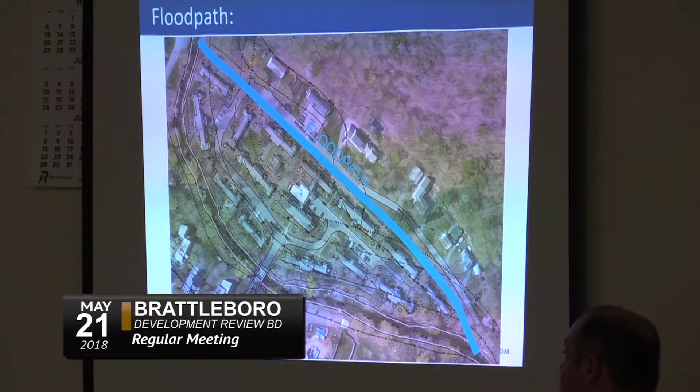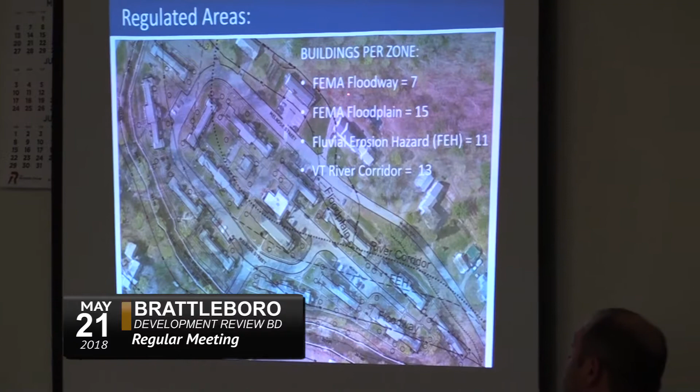And if we look at this next slide here, this shows the approximate flood path that occurred during Irene, where the water actually overtopped a retaining wall here and was flowing behind all these buildings, where the Whetstone actually is down this way here. So many of these buildings were damaged during Irene and have been historically damaged. So as part of the site, these are many of the flood hazards located on the site. We have the FEMA floodway, which is shown down here. We also have the FEMA floodplain, which is up here. The fluvial erosion hazard line is here, and then the Vermont river corridor is this dashed line here. So you can see the site is very prone to many different hazards.

Where do those come from? Well, the FEMA lines are directly from the flood insurance study for the town of Brattleboro. And these lines are from the state river corridor work. Okay. And they just represent how the river wants to try and move around a bit and gives the river room to move. Unfortunately, we have development in these areas that we have to protect.

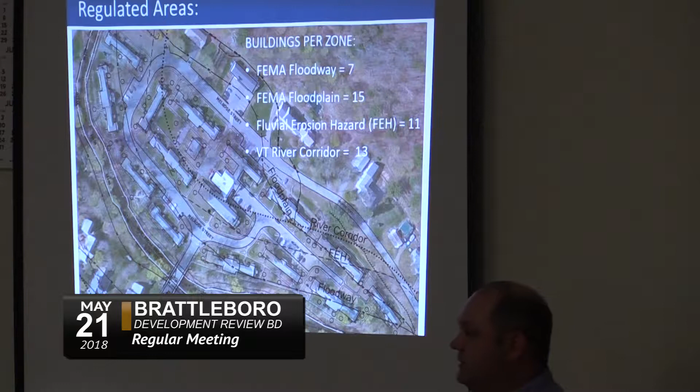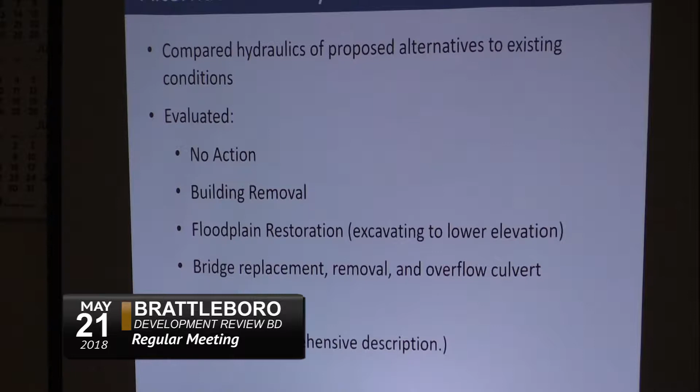So as part of the first phase of the project, we went through a series of different alternatives and looked at many different options for trying to reduce the flood risks on this site, including, of course, we always look at no action, building removal, floodplain restoration, replacement of bridges, and also a combination of all of those together. And there's been a report prepared that summarizes all those alternatives and how we came to the preferred alternative.

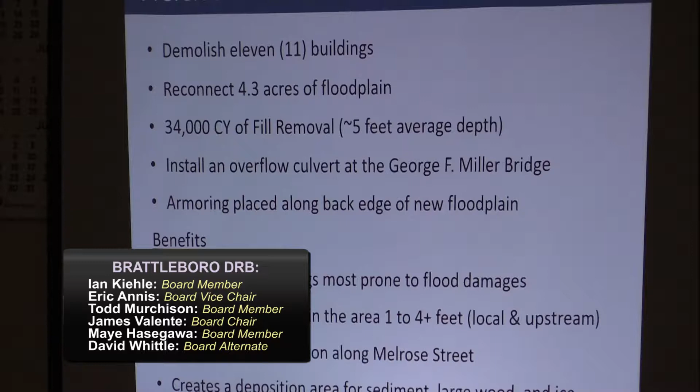So under the preferred alternative, we are looking at demolishing 11 of the residential apartment buildings that are on the site. And part of that project will be to create and reconnect almost 4.3 acres worth of floodplain. So that will become new flood storage given back to the river. And approximately 34,000 cubic yards of fill removed from that area, which averages about 5 feet. Average maximum, I believe, is around 7 feet.

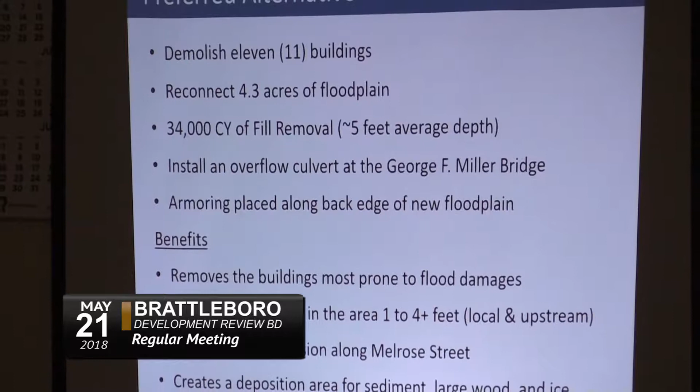And there's also an installation of an overflow culvert. So this culvert will actually sit up a little bit higher than the normal channel and allow water to flow under the George F. Miller Bridge. It will be placed next to the bridge. And then also, to protect the remaining buildings and infrastructure, at the rear of the floodplain will be some slope armoring to provide protection against that.

So a list of the primary benefits of this project: we're removing several of the buildings from the flood risk hazard area, also reducing the flood levels locally and upstream by about 1 to 4 feet, depending on where exactly you are. Also, we limit or reduce the risk of the water flowing behind the buildings, because now we have more flood storage and the water will access that area first, rather than overtop the wall that sends water out behind the buildings.

And it also creates an area for sediment and large woody debris. Any ice flowing down the river will store on the flood bench, on the restored floodplain, rather than becoming clogged at a bridge, such as the Route 9 bridge or the George F. Miller Bridge.

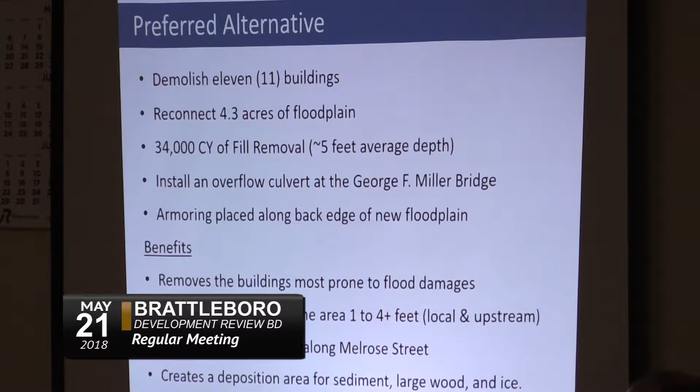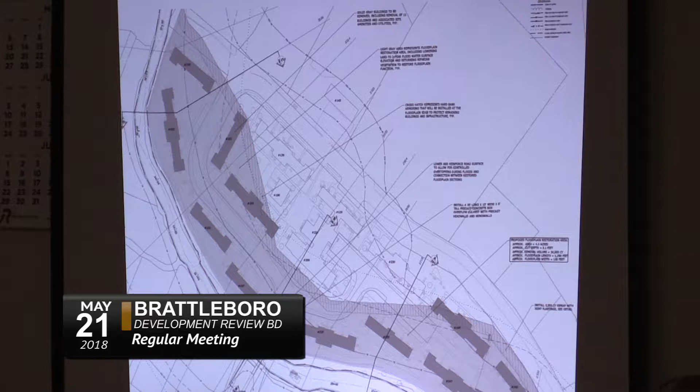So now we have cross sections. So if you took a slice through the site, this upper area, the gray represents a building to be removed, whereas this building is to remain. This hatched area is the material to be removed. And then we have the armoring here. So the upper cross-section and the lower cross-section are very similar, where you have the building removal and excavation of the material on this site. The middle section actually cuts through the George F. Miller Bridge. And you can see this is the existing opening here, and that's the overflow.

To point out, the dashed line here is the existing 100-year flood elevation, and the solid black line is the reduction in flood. So that represents about a 1 to 4 foot lowering. So up here, that's probably the 4 foot lowering here. That's likely about 2 feet, and here's probably also around 2 feet. Also on the restored floodplain, there'll be new plantings, revegetation of the disturbed land where the floodplain is being created.

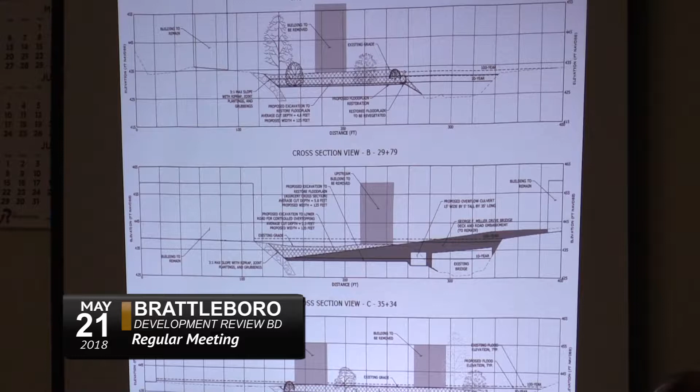I think it might be helpful, given that we have a lot of members of the public here who I think have an interest in this, if you described the difference between the floodplain and the floodway. Sure. So the floodplain is the area that's inundated by a 100-year flood, and it represents the area that would be underwater. So the floodplain is projected out in either direction until it hits the terrain, the existing grade, for example. The floodway represents where the bulk of the water is moving downstream during a flood. And the way that's created is you essentially take the edges of your floodplain and you squeeze it down until you have like 1 foot of rise. And that is where the bulk of the water is moving during a flood of that size.

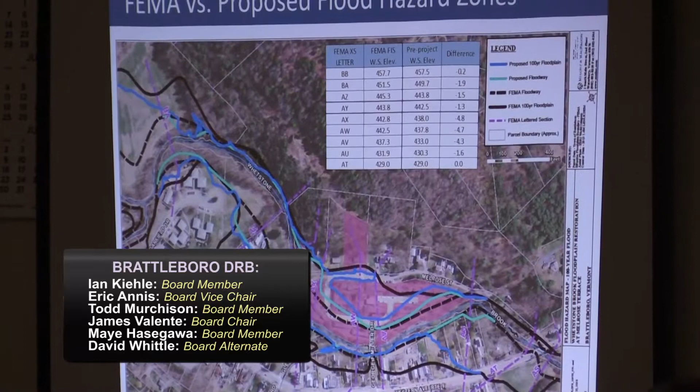I ask this not because it's relevant to your project, but is that the little park, Tri-Park, that got moved essentially into the floodway there? Is that the little row? Yeah, there, that sort of nub. Yes. That's off of Glen Street? Is that Glen Park here? Glen Park, okay. Sorry, go ahead.

That's okay. So here, the darker blue is the new 100-year floodplain limits, and the lighter blue is the floodway.

And if we cycle back and forth, you can see how the lines shrink in a bit, and that's based on constructing the new flood restoration project.

I just have a question about that dark blue line there. It seems odd - is your model saying the road will accommodate that? It just seems like a very odd shape there. Yeah, you're right, this is where that limit is now, so this whole area is included in the floodplain.

And then under proposed conditions, that shrinks down a bit, but it's showing us that this section of the road would still be under some water.

And then, if I remember that area, Melrose Street, at some point along there, there's a bit of a hill where the road sits much higher. Yeah, that's back in here, where it kind of rises up. This is low-lying all in here, and then that road. And right at the tip of that blue, there's a property, further to the left, that's not part of this. You see where that cross-section goes through, a little to the right - this one? Yep, and that would be before the hill, before the road goes up. Yeah, I think I see, okay thank you. Yep, I think that hill starts right here. Okay, you can proceed.

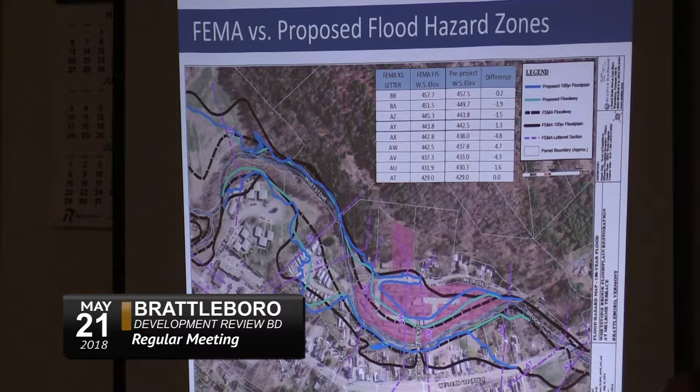So that's kind of where our project is at now. I just described the conditional letter of map revision, followed by a letter of map revision once the project is complete.

We're working on the finalization of the FEMA funding, which is funding all of the construction. These are the permits that are underway. As part of the project, we'll need an Army Corps permit.

The Vermont Stream Alteration Permit, and also a construction general permit. We are also working on our final design plans, and implementation of the project is looking to occur, at least the building demolition in 2018, followed by the floodplain restoration piece in 2019.

That's great, that's very helpful. Are there people on the board who have questions about this?

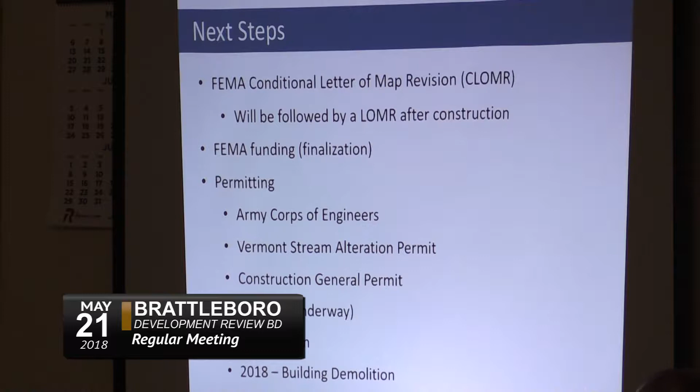On this right here, you show the buildings that may be removed. On the ones that you did previously, are there buildings going to be staying there once this is done? Is that the plan? Yes. And where would that be in the floodplain—if you want to go back a little bit to show the new floodplain limits.

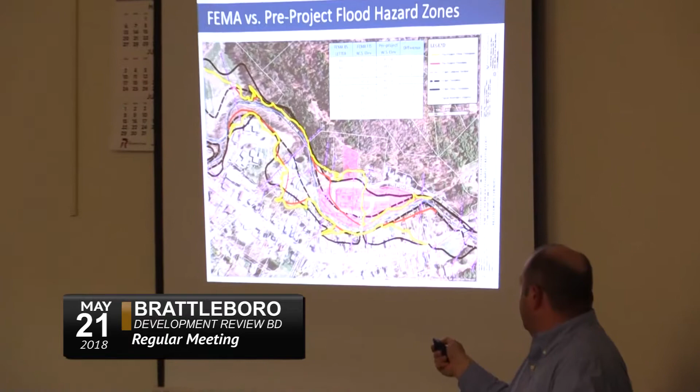I want to see where the buildings that are going to stay are. So this is existing here—these are the buildings that are staying, and one in here. And then under the proposed conditions, like these two buildings here would be outside the floodplain, whereas right now they would be inside. Same thing with these buildings here—these would be removed. I think these over here are being demolished, as well as those around the corner here.

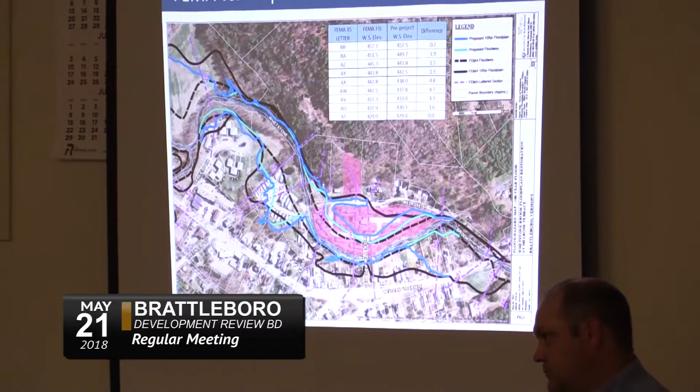This may or may not be germane, but is it likely that this revision would occur when FEMA reviews its maps anyway? It is, yeah. So anytime anyone does any project on a FEMA stream, they have to go through this same process.

They would also have to use the best available data, supplemented with the best topographic data available, plus new field survey. For example, this is a known constriction point that we looked at as part of our overall alternative analysis, the Route 9 bridge here. So if anything ever happens here, they would also have to study the stream and meet the same standards that we've met. And conversely, you can't really do anything without going through this process, correct?

That's correct, because there's a FEMA flood insurance study, it's a FEMA floodway, and also our funding required us to do a CLOMR. Just quick—this proposal's removing 11 buildings out of a total of 19.

So I'd like to open this up to the public, but I don't want to be premature. Is the board satisfied? Yeah, I'm fine.

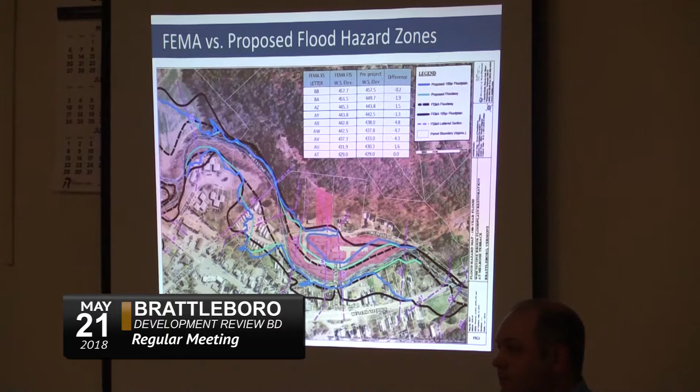My name is Aaron Diamondstone. I heard quite a bit—am I correct that you own the parcel, one of the parcels right next to this? Right next to it, yeah. And I heard a lot of talk about reducing floodwaters at Melrose and above, but I'm curious as to what happens below.

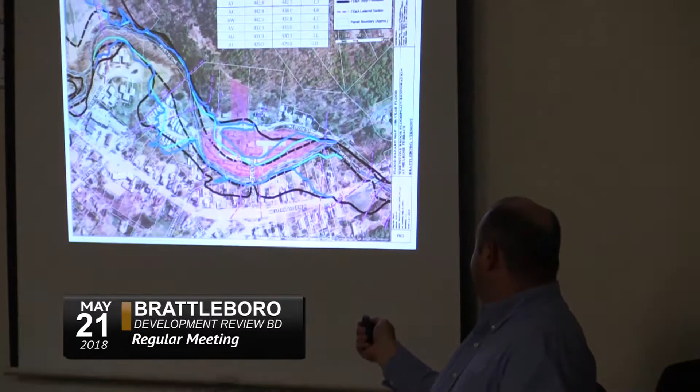So we are matching back into the FEMA data before you reach the Route 9 bridge. So in this stretch of the river here, we're matching back into the FEMA published data, so we're not reducing and we're not increasing the flood elevations in that section.

Is it correct that there would be a reduction in some of the severity or the speed of the water moving in a flood event because there would be additional capacity on the site? Well, the biggest benefit really is with that floodplain there—you're going to get the water spread out and slow down. So if there's a log, for example, flowing down the river, it's going to access that floodplain first and slow down, and there's much more chance for that log to settle out there than there will be here.

So if that log jams here at the bridge, which is already kind of constricting the flow some, you could get an increased backwater, and that even could raise the flood elevations through this reach. So even though their elevations stay the same, they might enjoy some kind of secondary benefits from this?

Yes. And one thing to note also, FEMA currently looks at only clear flow, meaning water moving down the stream without any debris or sediment in it. We saw that recently in Irene, where a lot of the culverts and bridges were clogged up with sediment and debris, causing these backwater effects to occur.

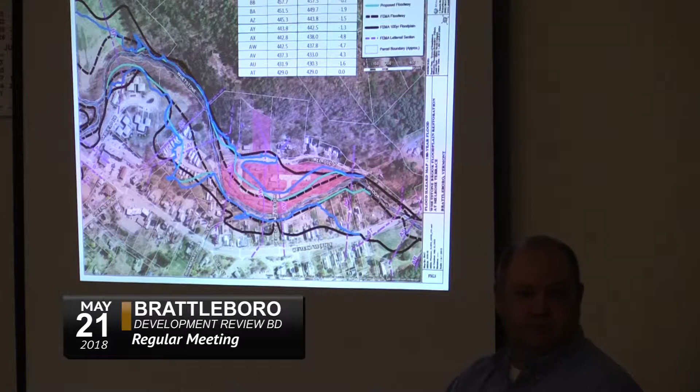Other members of the public who wish to speak to the application? Yes, sir. My name is Bill Wilmot. I live at 40 Glen Street, the abutting property just across the brook there.

Can I ask about the buildings that are remaining, the 8 buildings that are remaining? Are they to be used as housing, or do they have a different use now?

The reason those buildings are remaining is because they're currently being used for the 25 remaining residents in the public housing program. Once we build phase 2, which we hope to do in the next 2 years, those buildings will be empty. The intention is probably to tear them down, but among those is the very large building in the front that you see when you come down George Miller Drive.

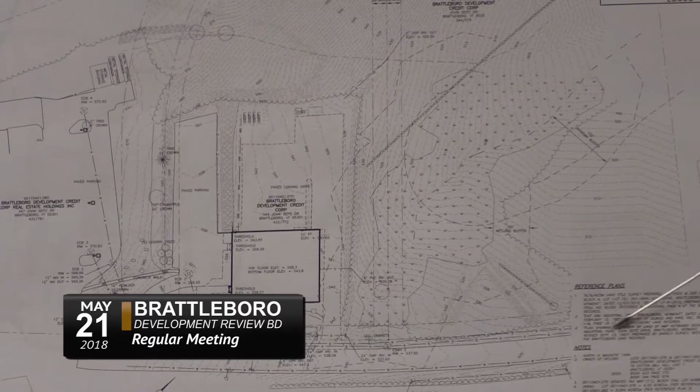The interstate is just off the topo here. And the building in question is this building right here. It occupies one lot, but the proposal actually has work happening on the neighboring lot as well. Right now, the lot has one building. It's common ownership, right? I believe it's common ownership, is that correct? Correct. Those are all currently owned by Brattleboro Development Credit Corporation. And they actually own this lot up on the back as well.

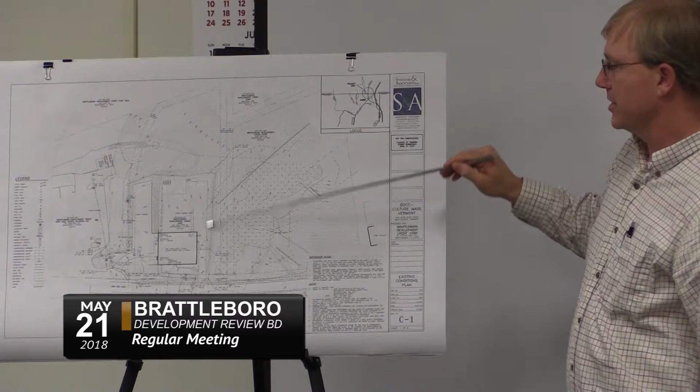Right. So currently, the truck loading for this building comes into the rear. Can we take one step back? There's one board member who's not familiar with where this is. No. Let's start there. Okay. Yeah, I'm getting a little confused too. It's in the Exit 1 Industrial Park. So as you come in, you've got GS Precision right here on your right.

You go all the way up to that little turnaround at the end. I guess I've never been that far. I thought there was basically a dead-end road. Is it past the plumbing supply? Yeah, it's the next building past F.W. Webb. Okay, so it's way up there. There's a stretch; this is actually F.W. Webb right here, this building right here. Oh, Webb building. Okay, great.

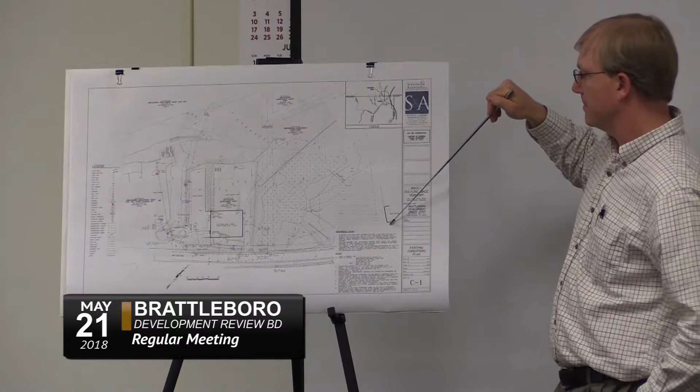You can probably see the parcel best from the highway. You can actually see it great from 91. Oh, absolutely. And when you come off exit 1, it's not where all the discount stores are. No, you turn the other way. You go south, like you're going to Guilford. And it's John Seitz Drive, which is the first large one. There's a brown and white sign that says Exit 1 Industrial Park there. Okay. Guess I never noticed.

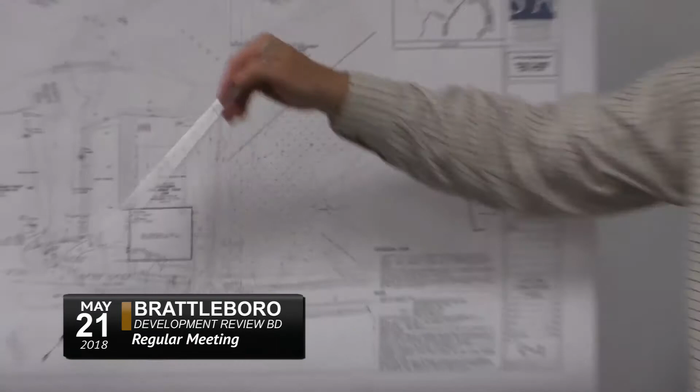You can't see anything from the drive. In reference to it, could we say it's the top of the hill? It's pretty close to the top of the hill. Okay, now I know. Thank you. Yeah, there's one building left, and that's this one right here. This is the GS Precision building. It's the next one past it. For that photograph, you can see the rendering right there. That is actually sitting in front of the GSP building. Okay, we'll go back.

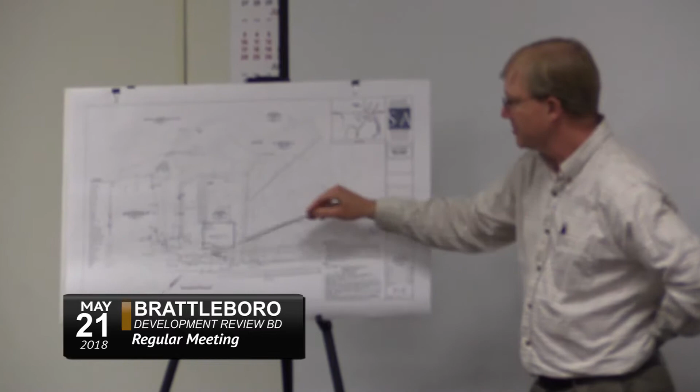Just to be clear, there are two GS Precision buildings. Yes, there's one at the bottom of the John Seitz hill, and then 347 on the top. Okay, so now that we're oriented a bit better, please continue. Thank you. So this is the current building, this is where the trucks come in, and the driveway for the parking is above it. It comes with that little cul-de-sac turnaround. This building is a 2-story building. You get access from the truck loading in the rear, and the top is where currently all the offices are, and the manufacturing took place in the lower section.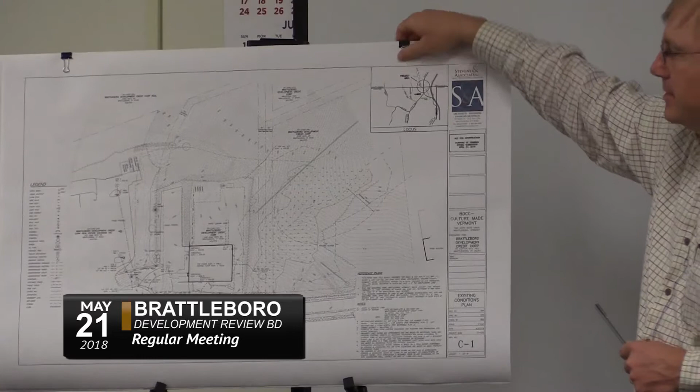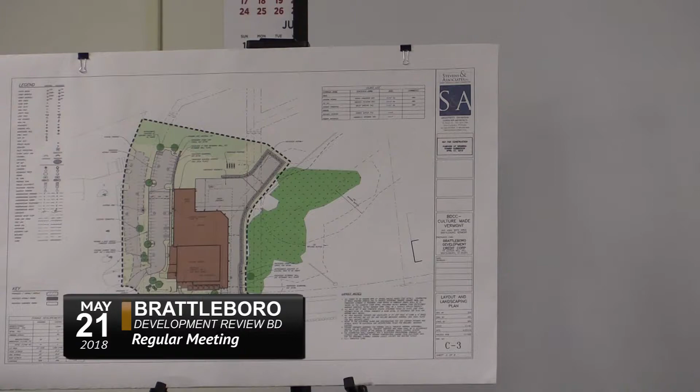Can I ask a question about access quickly? I'm sorry to jump in. There was a note about milk receiving backing into the receiving bay. Could you just show us on the picture what that means? Actually, it is in 2 places. It actually shows up in that picture you have right here. You can actually see the truck either backing in or pulling out. It's in the same vicinity as the driveway. But when you look at it from the site plan perspective, they would drive past and then back in?

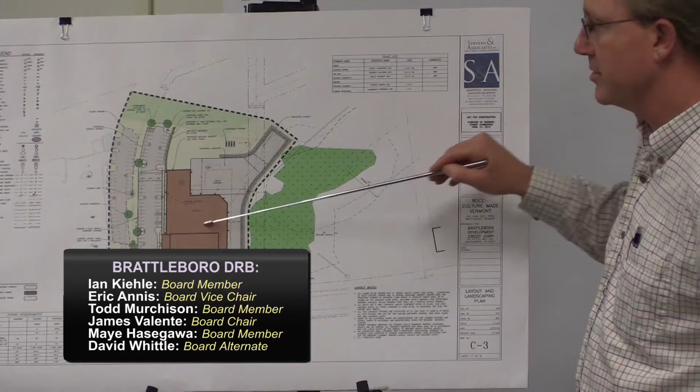That's right. So if we look at the building, this dark line is the existing building, and there's essentially an addition that goes in the front that services these silos, and then there's a milk receiving bay along this northern edge. And then this is a larger addition, which is where the storage, warehousing, and the truck loading is for shipping. But the receiving is right here.

So what happens is a truck drives up John Seitz Drive past F.W. Webb. It'll drive so it's parallel but in front of the building, and then it'll turn and back up. It won't turn around, it'll just back up and swing into the milk receiving bay. The back end drives in, and it pitches backwards because the front of the truck has to be higher than the back of the truck to dump it. It'll dump, and then there'll be a cleansing inside the bay, and then it'll just drive right out.

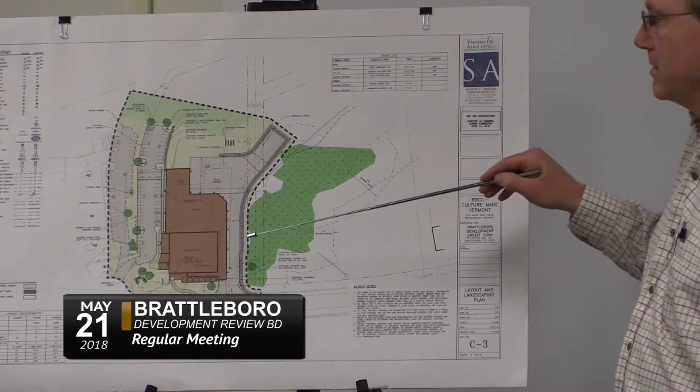And am I correct that this is functionally a cul-de-sac in the sense that these guys will have total control over what's going in, what's going out, and when? They have a pretty good sense of when; it's scheduled, yes. I don't just mean the deliveries, I mean all of the traffic. Yes. There's not gonna be other people going to other places in this.

Oh, I see what you're saying. You want to speak to that? Well, the folks at 347 John Seitz Drive will drive past this building. But that traffic is probably limited mostly to shift changes. And there's not a lot of delivery up there. And actually, that's what's happening here as well, for the most part. It's relative to shift changing.

Okay. And the truck traffic, as we understand it, there is truck traffic, but it's 3, maybe 4 trucks a day is what we understand. Okay. Okay, you can go ahead, sorry to interrupt you.

No, feel free. So, since we're at the truck area, this will continue to be the truck area. So this is the milk receiving in this bay right here. And then trucks will actually drive past that, come into this area and back into a loading dock that's right here. And that's typically for shipping. It'll be for delivery of dry products, packaging products, things like that.

Waste is actually in here as well, but the waste is internal to the building. I believe the dumpster is actually internal as well, isn't it? So there's no need for external dumpsters.

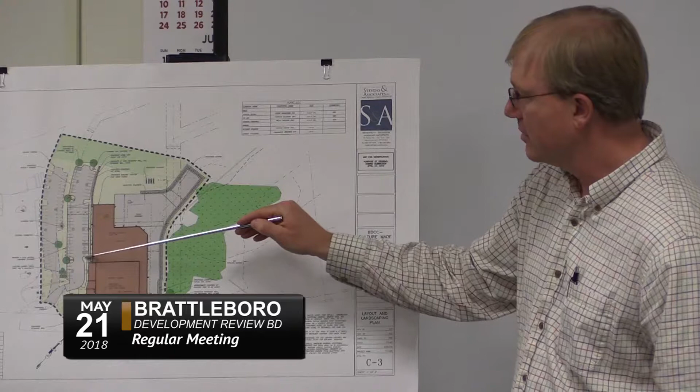If this is the other area, we look at that area being sidewalk, not for trees. There's a sidewalk that's going through this area to connect the parking lot to the front entrance. I'm not sure which one they were referring to. Do you know? It was the first one you mentioned. This one here? Yeah. It's kind of the northwest, isn't it? Yeah, northwest.

Well, whatever. Can you tell us about some efforts that are being made so that this project is energy efficient? LED lighting? Yeah, you want to speak to that? Sure. On the process side, Efficiency Vermont has taken a very active and very much appreciated role in choosing and designing the layout of the building.

So as a manufacturing facility, it's going to have a fair amount of energy consumption through some pretty large equipment. And they are joining project meetings every week now. The principals and Efficiency Vermont are identifying the best equipment to use to reduce the amount of electricity in the plant. And I think they're even providing some grants, again, much appreciated grant money, to support the purchase of equipment that probably has a longer payoff in efficiency savings than could otherwise be afforded. So they're getting some good equipment that way.

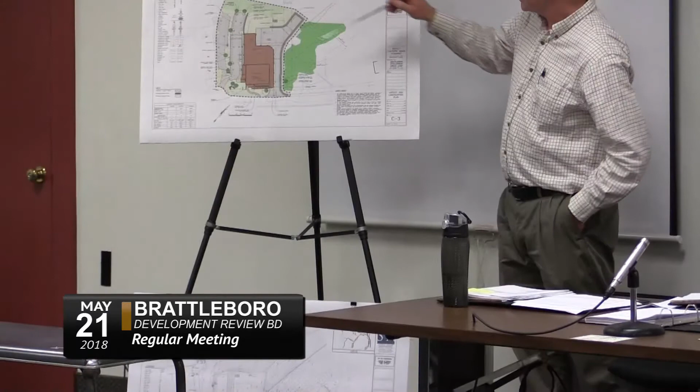No problem. I was curious, is there a need for right-of-way here? Is it possible that one of the parcels could be sold and create an issue? Or the parcels are just gonna be merged and treated as one parcel? What's that? There's 3 parcels here right now, or I guess maybe 4. There's the GSP parcel that's right here, that's being occupied by GSP. There's this parcel up here, which is a vacant parcel, which has essentially a right-of-way, but it's a parcel of land that goes through it.

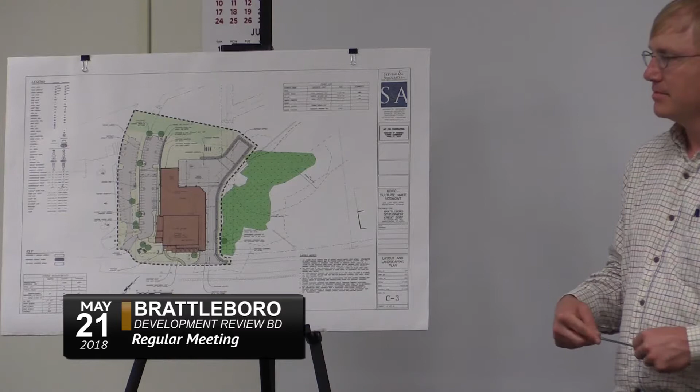And then there's the one that the current building occupies, and then there's the larger empty parcel that we're looking to utilize as well. Which one do you have? I just understood that this took place on 2 parcels. Do I have a fundamental misunderstanding? No. There's the overflow or expansion, future phase parking. It's on BDCC property, but a different lot, that kind of spaghettis down off of the top of the hill all the way down to John Seitz Drive.

So the idea is that there might be some development in the future that would require those 2 things to be tied together. And then we'd have to figure out how to get back up to the very top of John Seitz Drive that's currently wooded now, and accommodate the future parking. Okay, but for the moment.

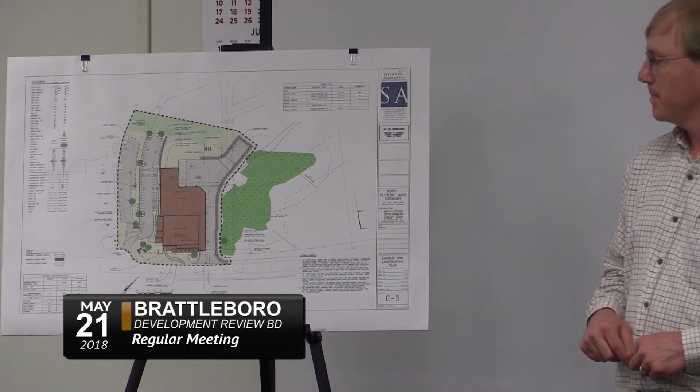How noisy is this gonna be? Less noisy than the highway. Touche. It's gonna meet the standards for the industrial zone. I mean, I don't anticipate it being any more noisy than a normal industrial zone would be. Meeting the standards sounds fine to me.

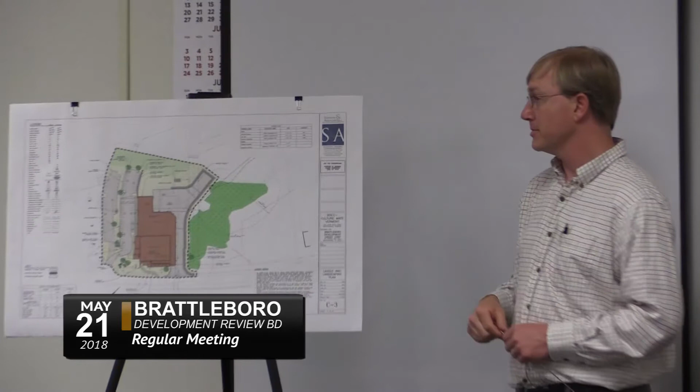Could you show on the map where the snow storage is gonna be, please? Yep. We're looking at this area right here, this area right there, this area, essentially up there. The point was to have it go on the other side from the wetlands, so the wetlands are downslope, snow storage will be on the uphill side. There'll be a guardrail and a fence along this edge for safety purposes, but it'll also prevent easy dumping of salt snow in the wetland area. That's all the questions I have. Other members of the very minimal board we have tonight?

I had a question about what I guess would be sort of a truck backup area. On this illustration, I'm just curious what that rectangular thing is. Those are the stormwater infiltration chambers, okay, and that's still subject to being designed. We're going through the state stormwater permit process. And then, because I'm a visual person, and this is a very interesting rendering.

So the trucks with liquid will be entering here, correct, and then trucks that will be picking up product will, I presume, enter here and then back up to those docks. And that's why the proposed concrete is an area where the trucks start turning their wheels and ripping up asphalt and having the extra weight. Yep. So that's why that is listed as proposed concrete as opposed to asphalt in the other locations. Correct.